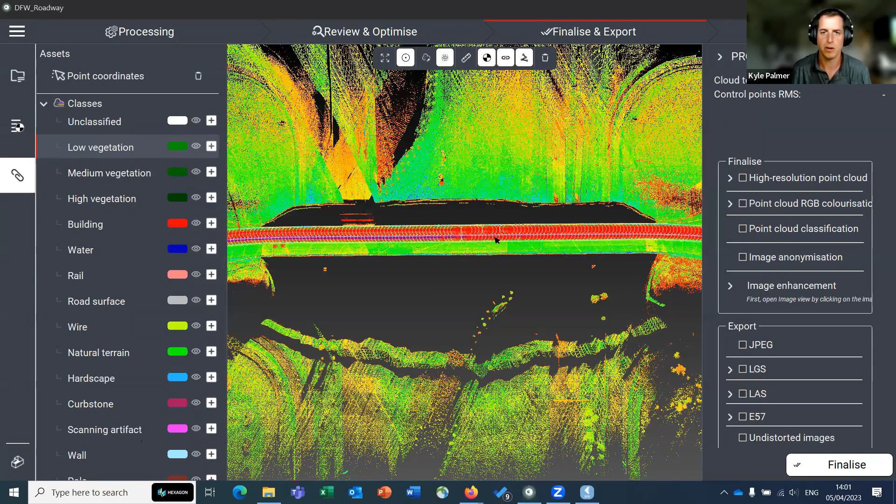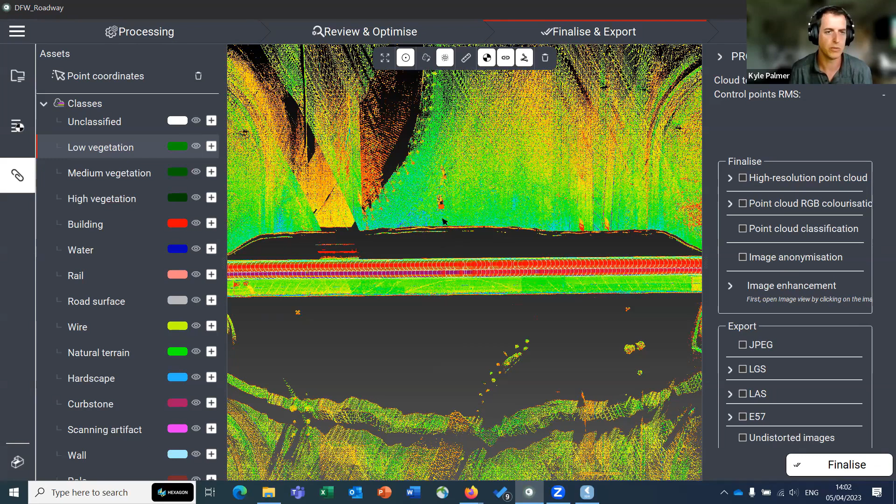So I'm going to go to a small little project that might look familiar to everyone. It's just an overpass, a 4-lane overpass, and mobile data. Looks really, really great, right? You got everything you need. Everybody's staying off the road, everyone's staying safe. And I talk to a lot of people at conventions and just on the phone, and they go, 'Well, this workflow is great and it's easy and it's helpful, but I've seen a lot of tools. What's so special about yours? Why does it get me there faster?'

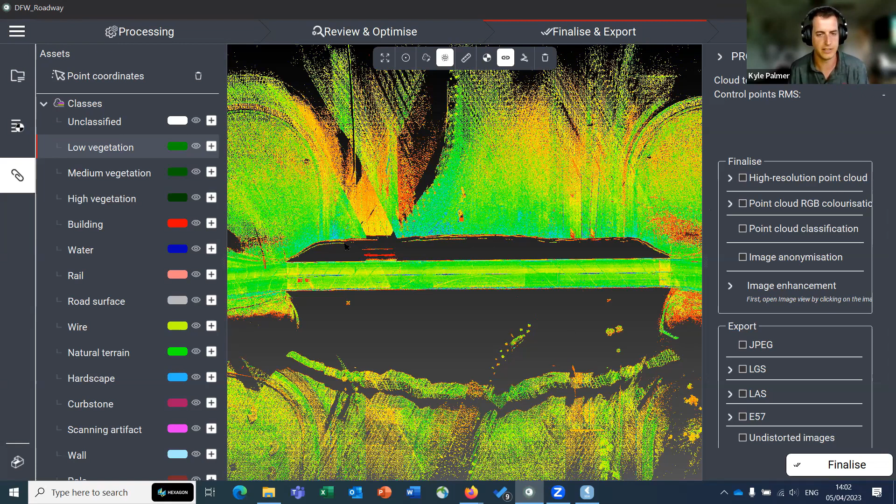Because the thing I hear a lot is extraction's the bottleneck, right? Well, this classification tool is really second to none. I'll show you why. To classify a point cloud, you get through the whole workflow - you load up your stuff, you get it on the right coordinate system, you do your QCs, you make sure everything's good. And then classifying is simply clicking this button, and it goes right to this fixed model. There's a series of layers here that you can see, and that list is growing and improving. So every release we get a new model update, so it gets a little bit stronger, better layers, but very semantic, easy to understand.

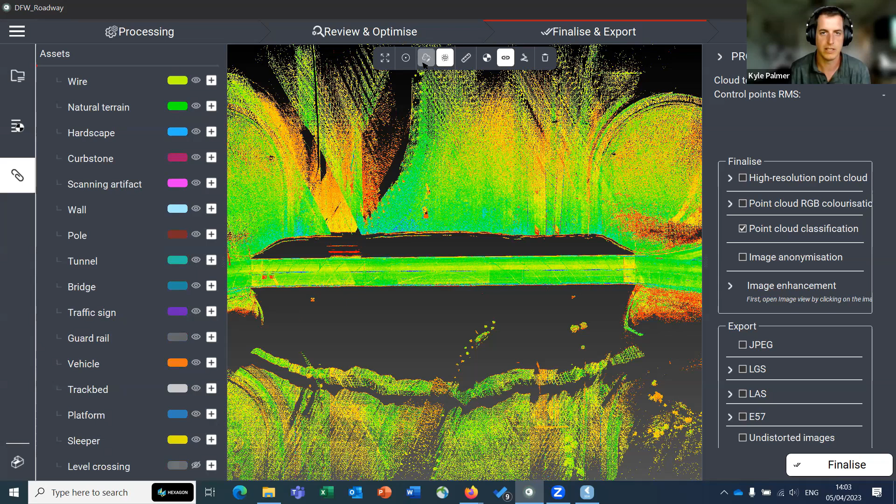So we'll talk about now what that looks like. You end up with a result something like this, right? So that looks great. We're here, we'll look at it in 3D, and I'll switch these off - they're a little bit distracting. Those are the track lines where I drove, and these red balls are the image bubbles, just in case anybody was wondering. So we'll go here and look and go, wow, that did pretty good.

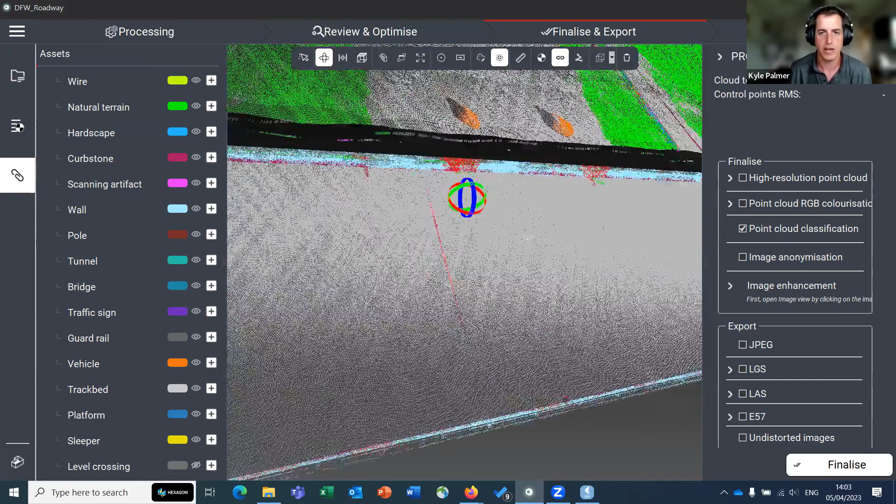So this right here is the road surface, right? And road surface, there we are. Road surface, so you can see it did an awesome job - it just pulled out the road surface right away. And I'll highlight the curbs - this is the curb one, I know this because of the color. And then this is a pedestrian, a man on a bike.

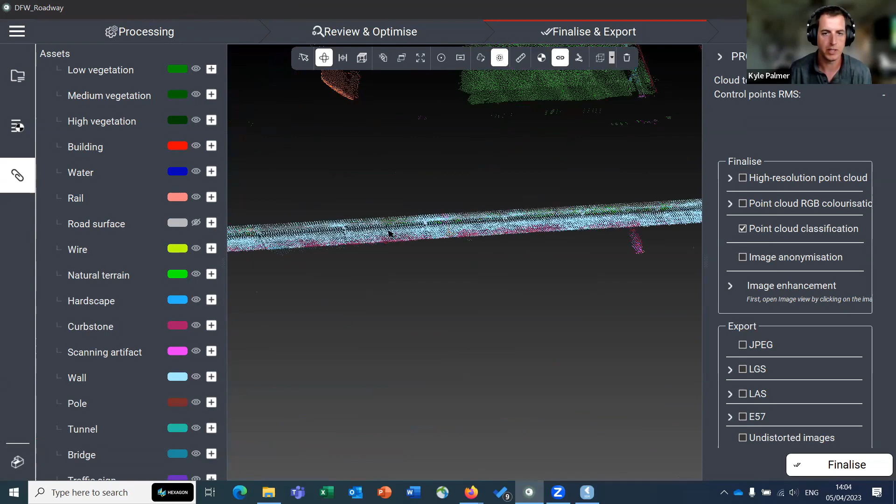So great job, right? Did an awesome job. But we can see there's a couple places where maybe it wasn't so perfect - it classified this barrier wall as a curb. I've just been working with this so much, I know these colors, but if I went and turned off curbstone, you could see some of those points disappear, right? Well, this is how easy it is to fix.

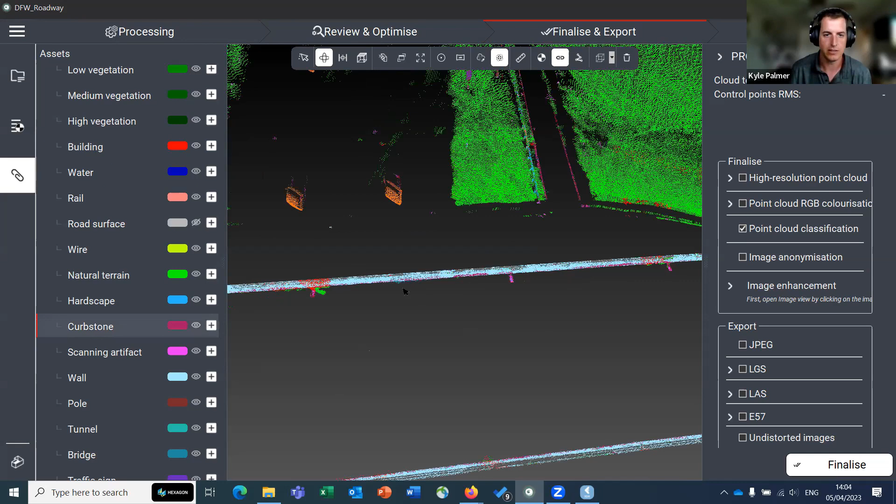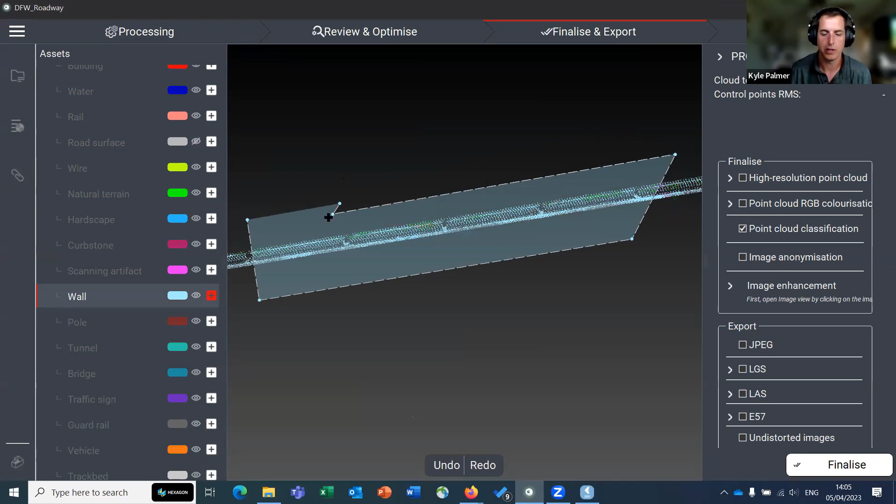We'll talk about fixing this real quick. So I want to go to - let's see - wall, so it's on that, it's all on that layer. So you can see there's a little bit of noise in there, right? Let's talk about fixing that. This is how easy that is: you just click the area that you want to fix that's separated from the road surface, just close it out, and it'll move everything into that wall layer.

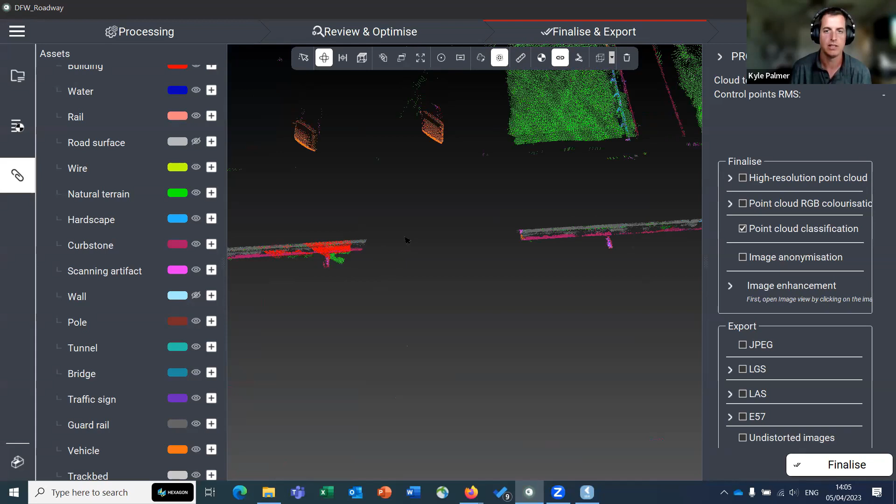So now when I turn off wall, you can see everything there from that wall is turned off. Now, I haven't done the whole wall, just to illustrate how powerful that is, but that's how quick it is. I've just talked about now how easy it is to fix the classification and how easy it is to classify. And then I know what a lot of you might be thinking - you might be thinking, so what?

Oh, it's great. It's all split up for me. Oh, what does that mean to me?

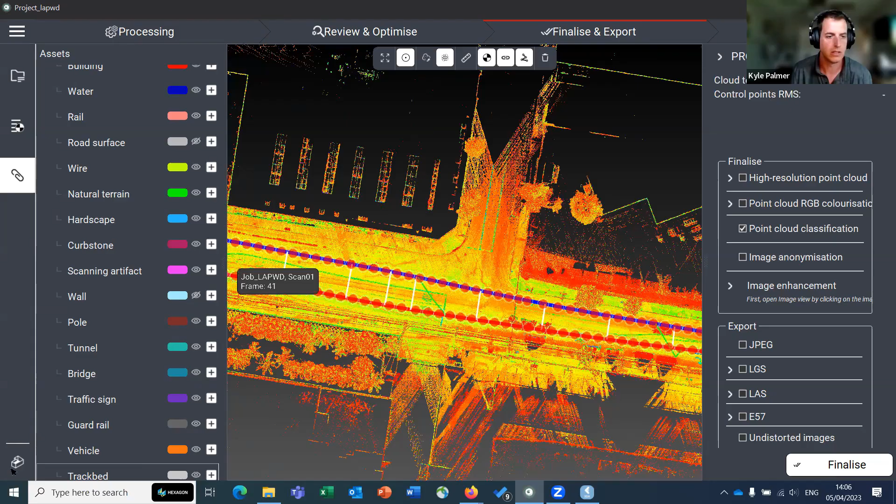I'll give you a great example. This is a project I collected in downtown LA. What would it mean to you to be able to take and do a quick building analysis for a client? We've got this road and this stretch of road, and we want to see if all these buildings match up to the building line.

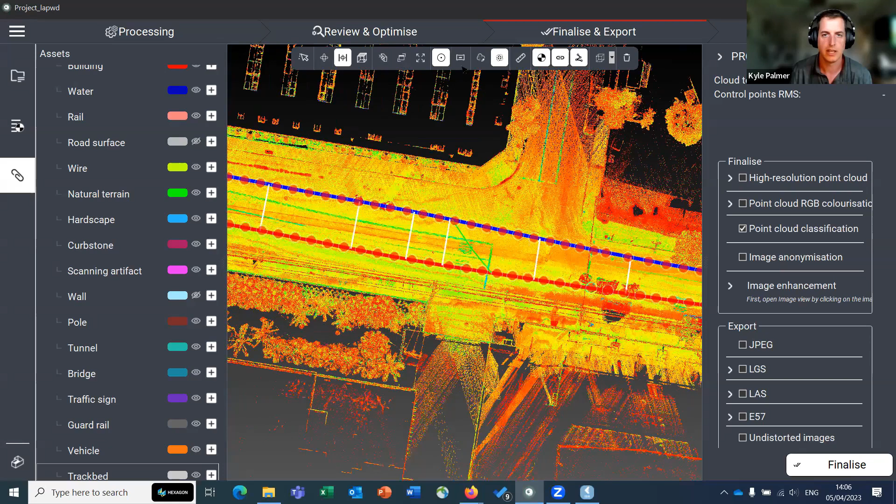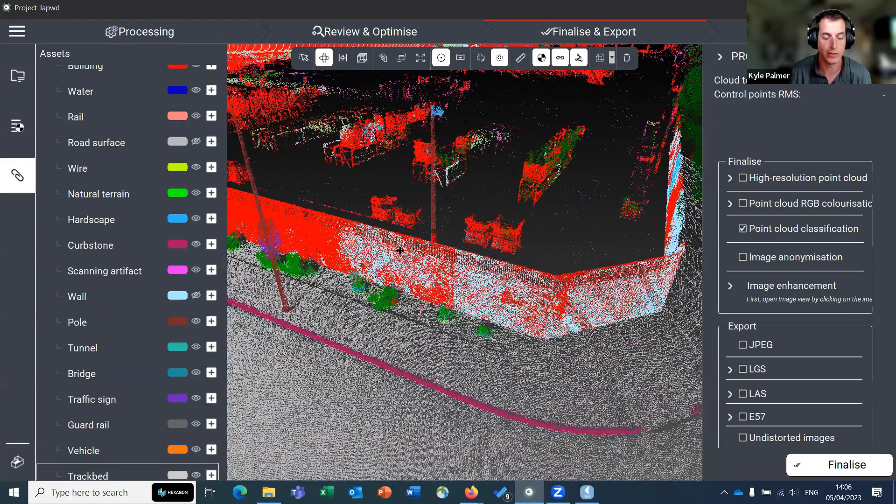Let's go look at it in orthographic, and we'll look at the classification. Look how powerful this classification is - it's classified all of these buildings. Like I said, it's not perfect, it's an algorithm, so sometimes there's a bit of a mismatch. It classified this as wall and then also building, but for the most part the building is pretty dead on.

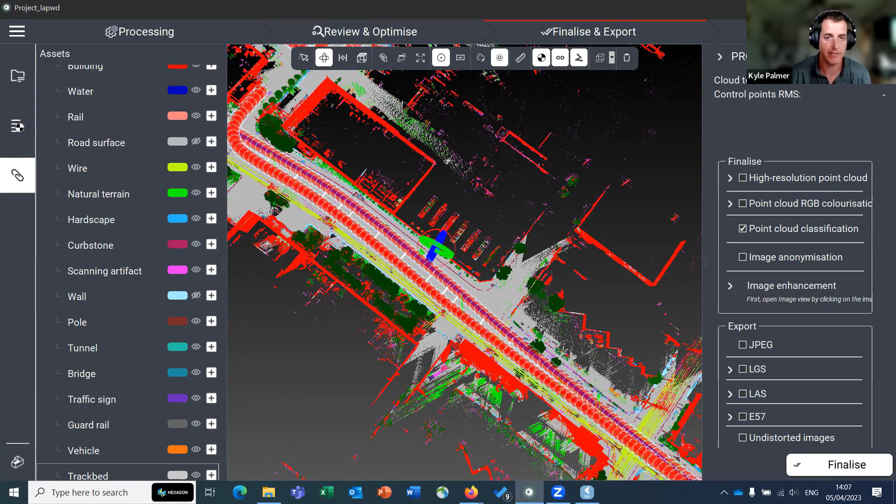So I could do a couple fixes, or I could export walls and buildings. I can pretty quickly port this over to something like Cyclone 3DR, or I could take it through CloudWorx and CAD and just trace out these buildings, or I can automatically extract these buildings. I could just have every single building in this project classified.

And the way that works, I'll show you here - there's a setting in Finalise. One of the really powerful tools in this software is the exports. You can export by a single track, which is this.

I'll show you here, we'll close this. This would be a track. You can export that whole track as one point cloud, or you can export by track as multiple files. You can restrict the size of the file - say you want a quick analysis and want to restrict the point size of each file. Then you can export by track and classes, and you can also split by the scanner.

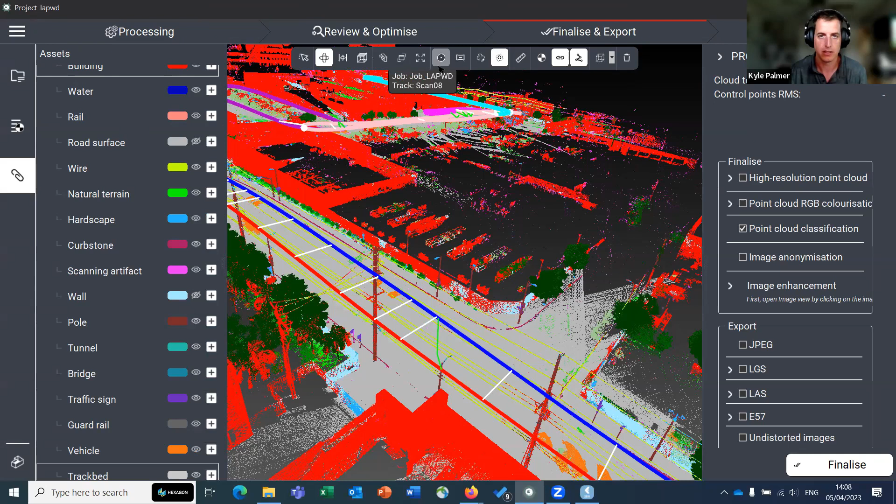So let's take a look at what that means. In this case, this is a TRK 700. What you can do is, this is a scanner and this is a scanner - you can split by those scanners and really fine tune what your deliverable is. And then you can split by class, exporting out individual classes. Each of these is a separate layer.

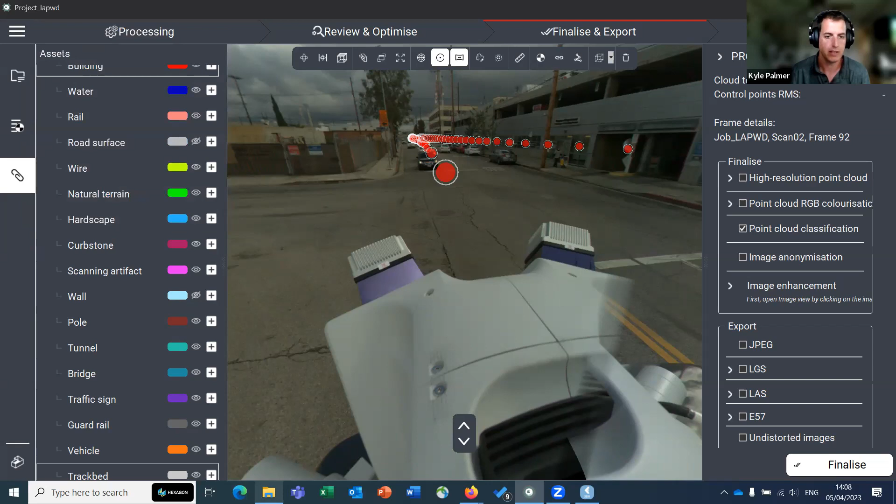So what that might look like, in the case of this downtown Los Angeles project I showed, I can just bring in every building and wall layer I want to and visualize those only. So let's take a look at that.

3DR desktop, we'll open a new instance of that and see what that looks like. I can perform an analysis on that - I can just pull in the road, pull in poles and wires, and work on the things I want to work on and restrict a lot of noise. So I'm saving myself some grief down the line.

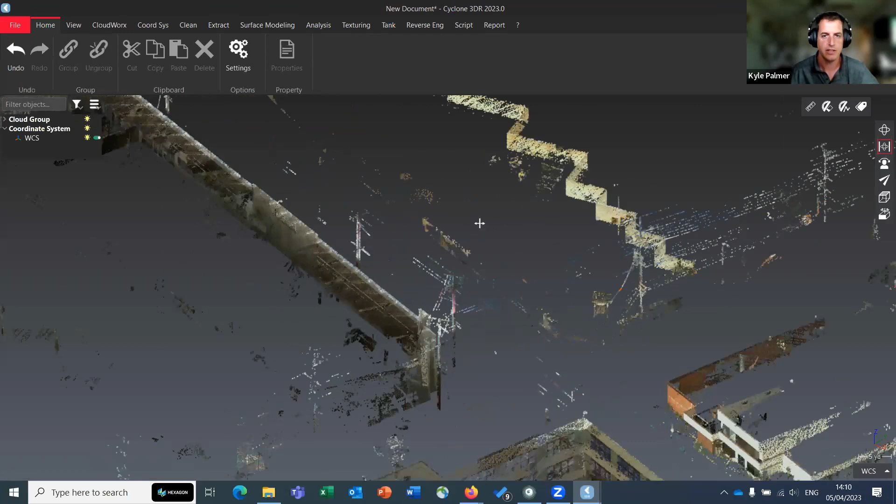Let's look for the building here. All right, let's just do that - we'll pull those in very quickly. And you can see what a good job it did just pulling in the building faces. So if I had to do a quick analysis, or I only cared about this one feature, I can quickly export these things and not bog down my resources on my computer by pulling in an entire point cloud.

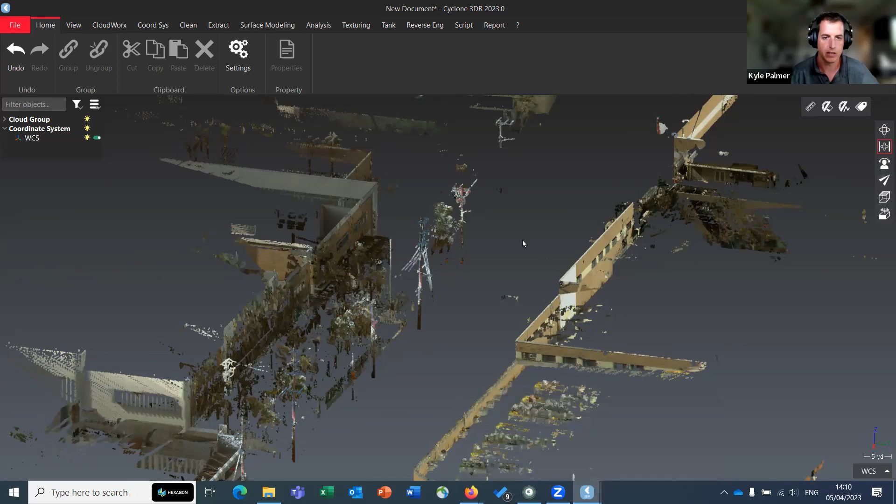Case in point, I have one here - a runway that I worked on. That's a great example of this. So let's look at the runway, the project demo I did. Let's go look at this runway here.

And this is about an 18,000 foot runway that I did 6 passes with full cameras and everything. And it's a lot of data. It's a ton of data.

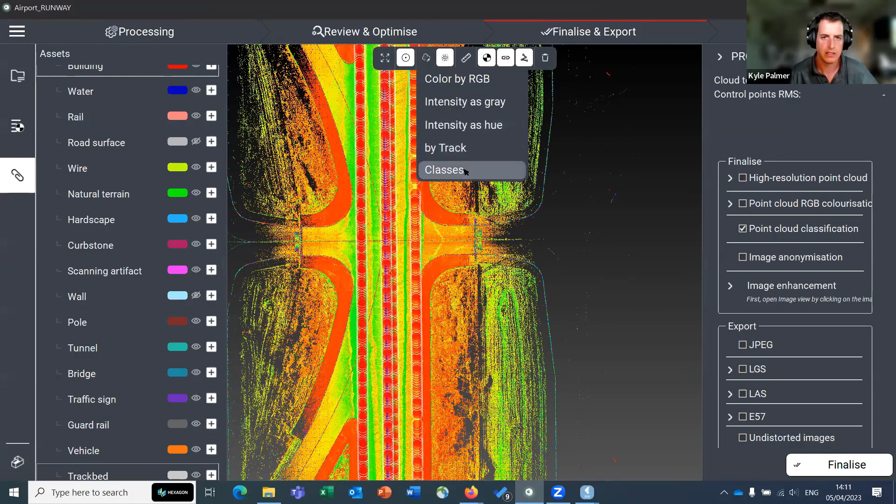But with the classification tool, one of the things I can do is I can basically switch off all the noise and everything that I don't want, and pretty quickly get to analyzing. So I can turn off vegetation, everything here.

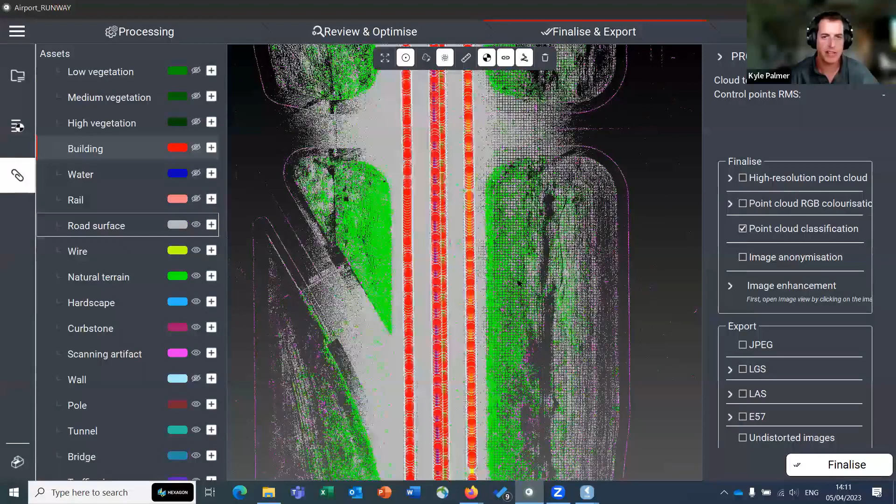What that ends up looking like is, turn off the natural terrain, we'll turn off everything here, all these guys, and a couple more. What that ends up looking like is this.

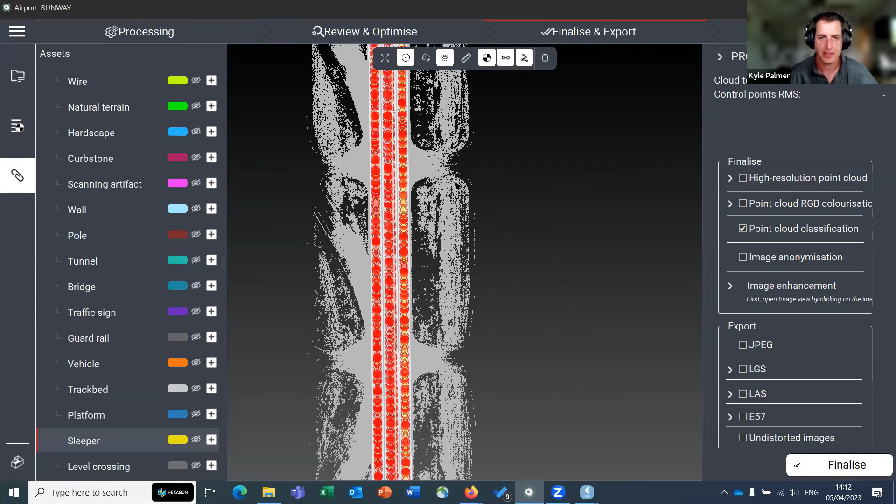So this is optimized to handle LiDAR data. Let's say the algorithm kind of messed up, like it did. It sort of classified some of this as pavement. Really quickly reclassify that as natural terrain. Done. That's how fast that is.

Then I can just eventually export out, and I've left it this way on purpose so I can illustrate this in Cyclone 3DR. So I can pretty much just export out this layer.

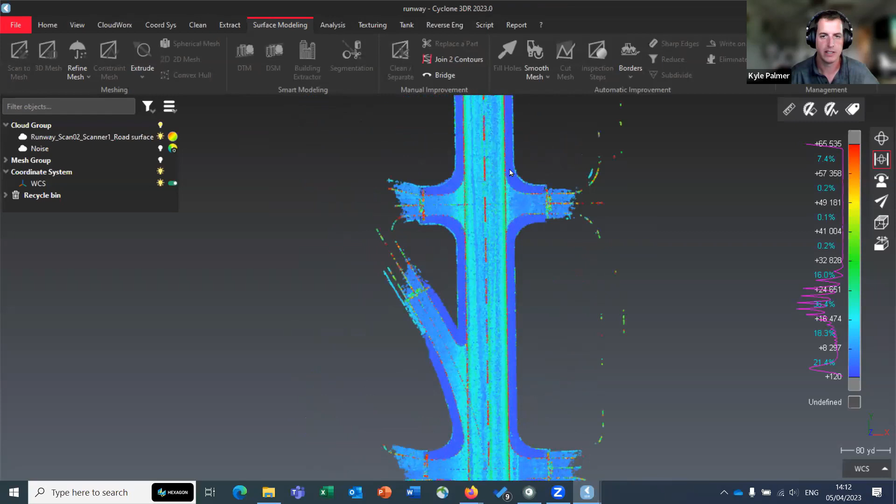And what that looks like is something like this, right? Where I have this and I can really, really quickly do a mesh, a ground mesh on pavement only, and then extract a 30-foot grid of topo points. So I'll show the mesh here.

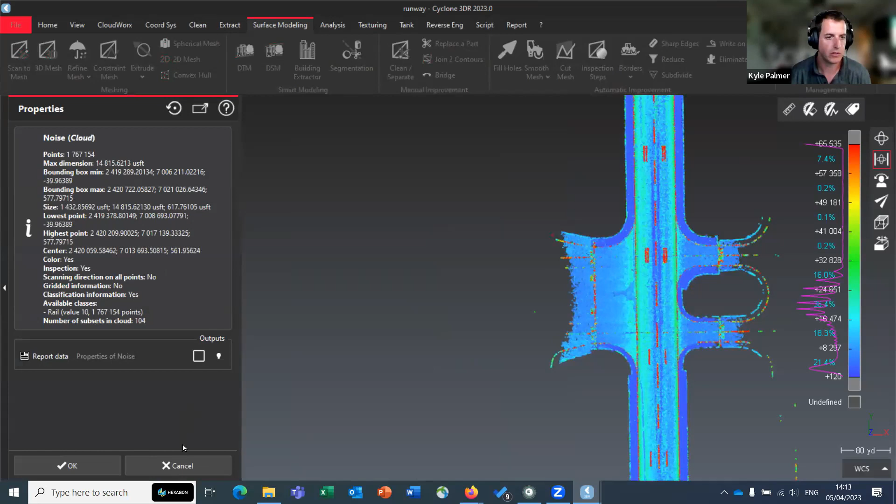So let's talk about this. Just the runway, it looks like we've got about 480 million points. And then that noise constitutes about 2 or so million points, right? That's what that would look like.

And then you can take a look at the mesh. You can do a mesh, and everybody knows and loves 3DR. You can do a mesh really, really fast, and we can just pull out the pavement on the runway.

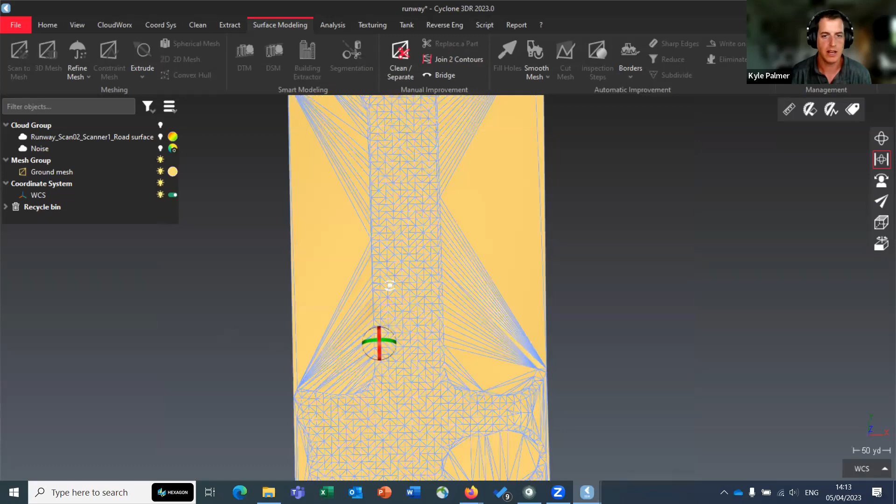I think this is a really powerful tool. I think it has a lot of potential. I think you have the potential now with mobile mapping and this tool to go extract all the buildings, extract all the poles and wires.

Or if you drove a job - and we always talk about in LiDAR and reality capture - you capture all this extra data, right? So you have all these edge cases, and you capture so much so you don't have to return to the project. Well, this takes that to the next step.

So, for example, if you were capturing all the poles and wires from a project along a roadway, and the customer suddenly said, well, we need to bring in some new equipment, right? We need to make sure it'll fit. We need to make sure we have clearances.

Well, you can say, let me shoot you over the runway. Let me shoot you over the high vegetation. Let me shoot you over any bridges or structures, just that layer, so you can do an analysis on that. This gets you there really, really quickly.

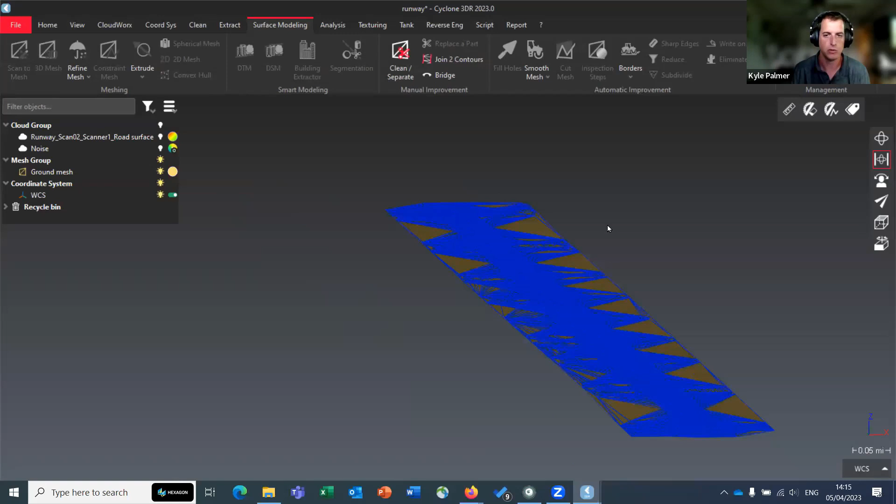Or you can pull out all the walls and fences on the side on a long linear project and do a quick right-of-way analysis and see if you have any encroachments. But that's it. It's a pretty quick tool. I'm proud of it. I think this is a great product, and I think it's very powerful.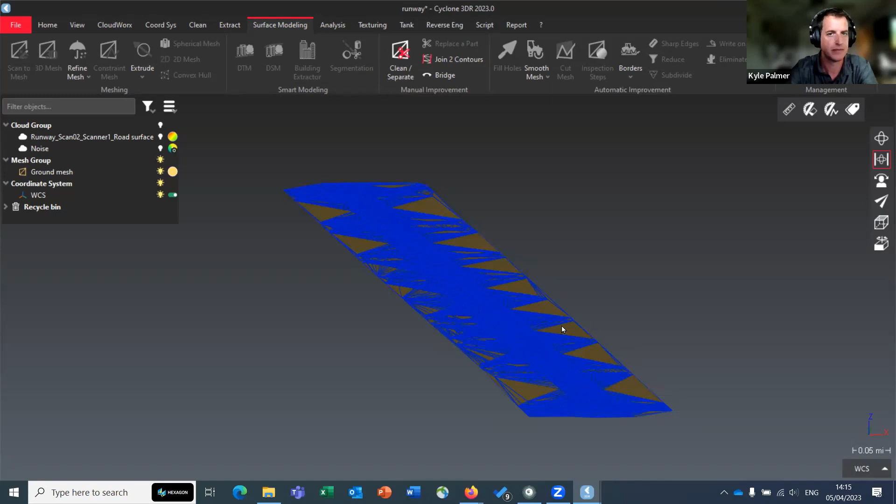So Kyle, one of the questions that we had come up from our Facebook group is someone asked, what is mobile mapping? And I realized, well, for those of us who work in the industry, that might be somewhat self-evident. At the end of the day, I think folks that come from a background of static mapping - placing your scanner in one place and shooting for a period of time - might not be familiar with how mobile mapping works and what are some of the benefits and parameters of it.

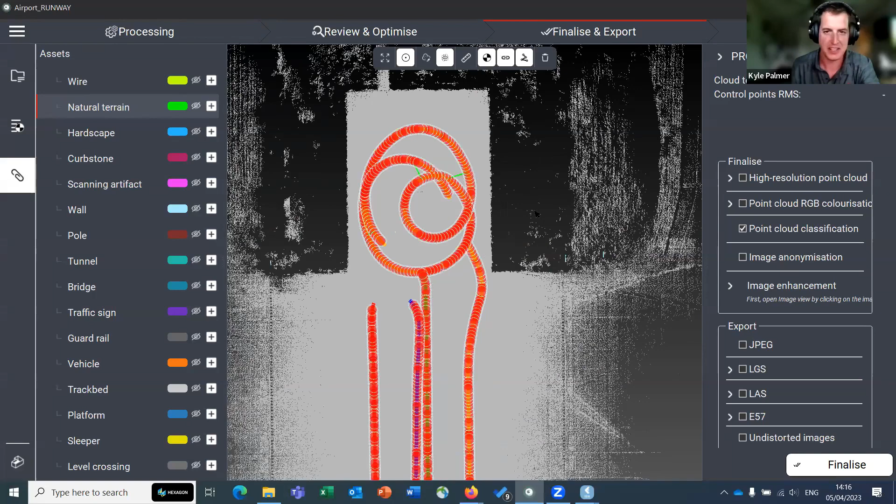Yeah, I'd be happy to answer that question, and it's a good question. I started this off with the assumption that we'd all know, which maybe I shouldn't have. Thanks for asking, I appreciate it. I work in it all the time, so I forget to look up every now and again and educate on that aspect. So mobile mapping is...

a process by which you put a sensor on a moving vehicle and collect LiDAR data and imagery at the same time. So there's multiple sensors.

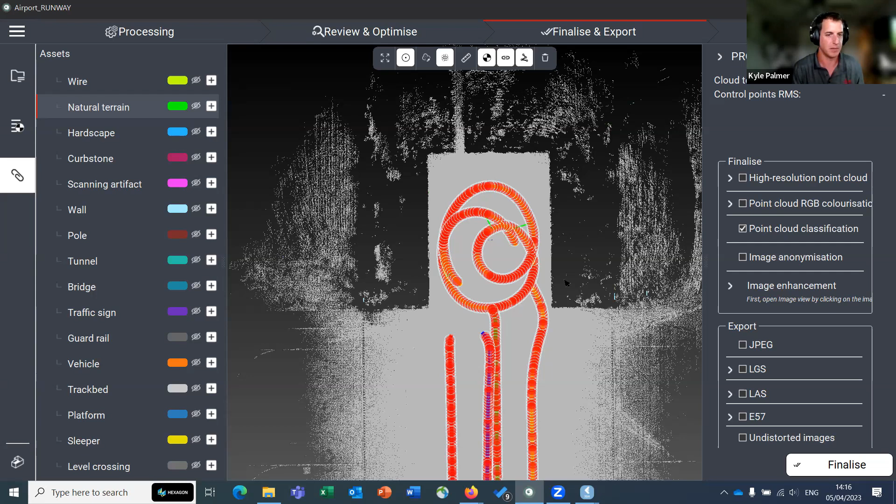Let's take a look at this one, let's take a look at our guy here. This is what the sensor looks like, and this is what the collection vehicle looks like. We'll just take a look at it in reality here. So this is our sensor - this is a TRK, and I'm in the tower cam.

So right here, you have our main workhorse sensors. This is an Optech CL360 HD, and what it does is it spins in a circle - it just shoots LiDAR out in a circle, right? Both of these, and they're at a 30-degree offset.

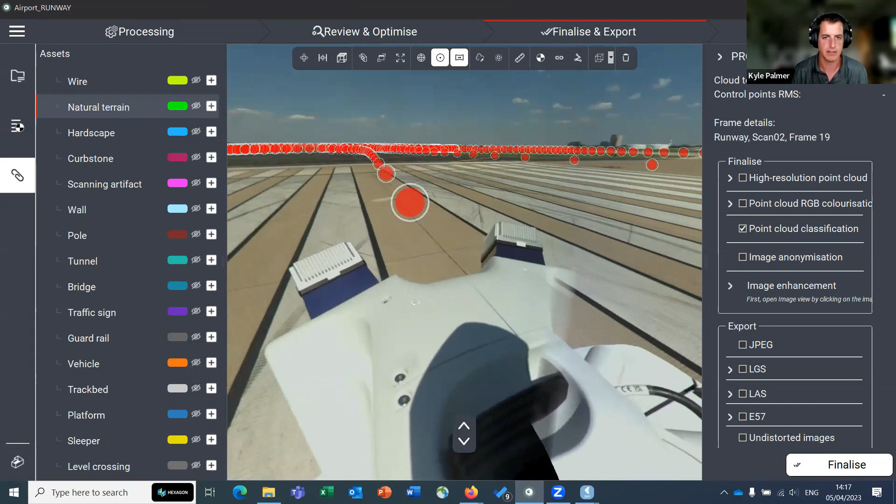Underneath me, actually right here where we're looking, is a GNSS sensor, and then underneath that is an IMU. The GNSS sensor records the absolute position of where we are at a periodic rate, right? And then the IMU records movement.

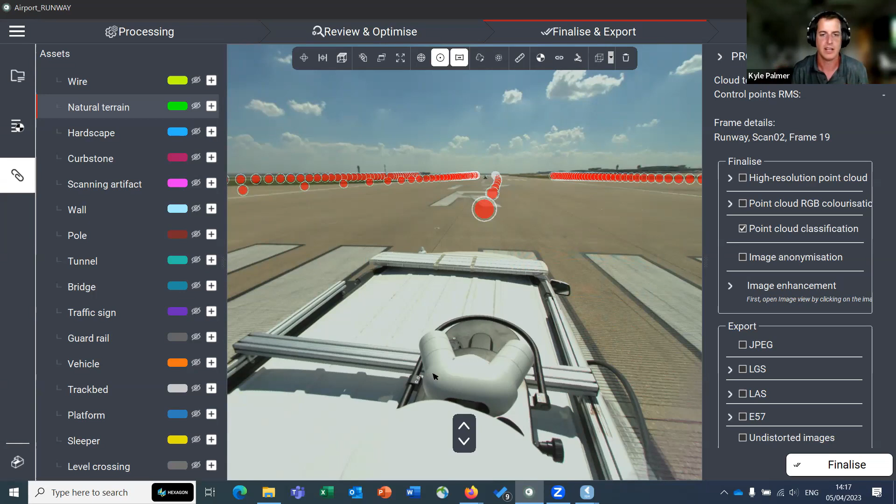It's maybe out of the scope of this how an IMU works, but basically it's a fiber optic kind of strand that moves around, and there's some sensors that show how it moves around. And then each one of these sensors resolves to this one, the GNSS, and then the IMU - they resolve to a line called the trajectory line.

So we'll take a look at what that looks like. This would be the trajectory line, and it shows how you drove. So as we drive, it moves along. We'll go back to our sensor here, back to our sensor point of view.

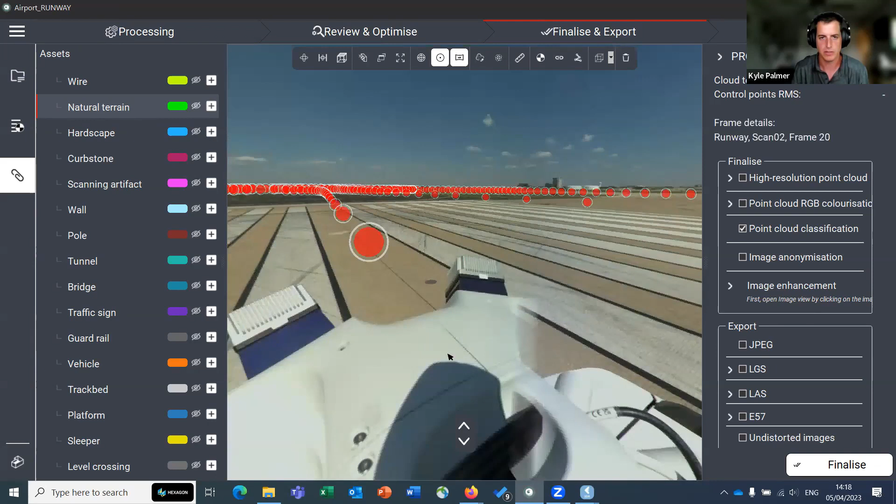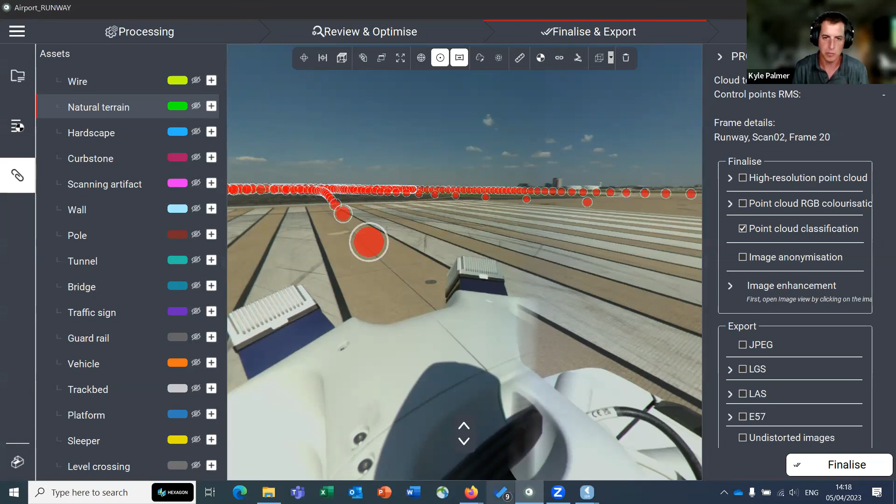It moves these along because these don't spin like your traditional terrestrial scanner - they just spin in a circle. They don't move around an axis and then spin around like an RTC 360, right? They don't do that, they're just stuck there. So as you move, that's what creates the point cloud.

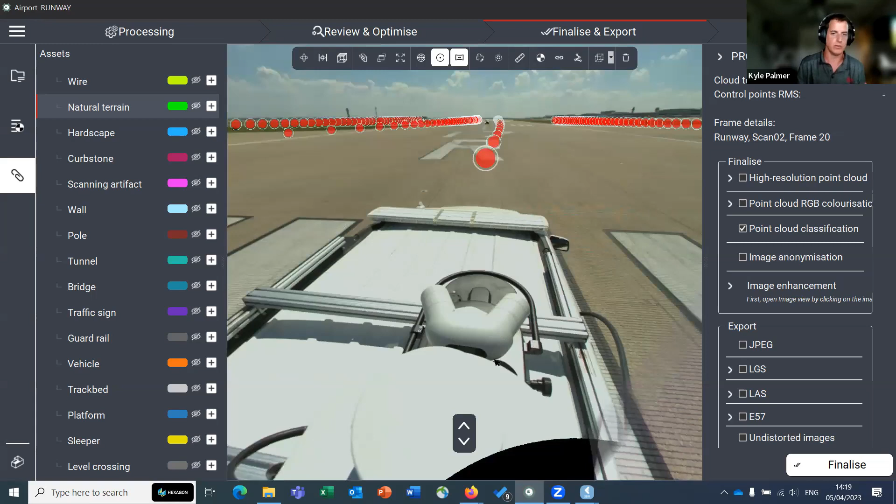There's also two additional sensors in here. There's a SLAM sensor, which is short for simultaneous localization and mapping, and it uses a Kalman filter to use LiDAR to determine a trajectory. There's a sensor in the front, and then you can't see it on here, but there's a sensor in the back underneath the body of this thing.

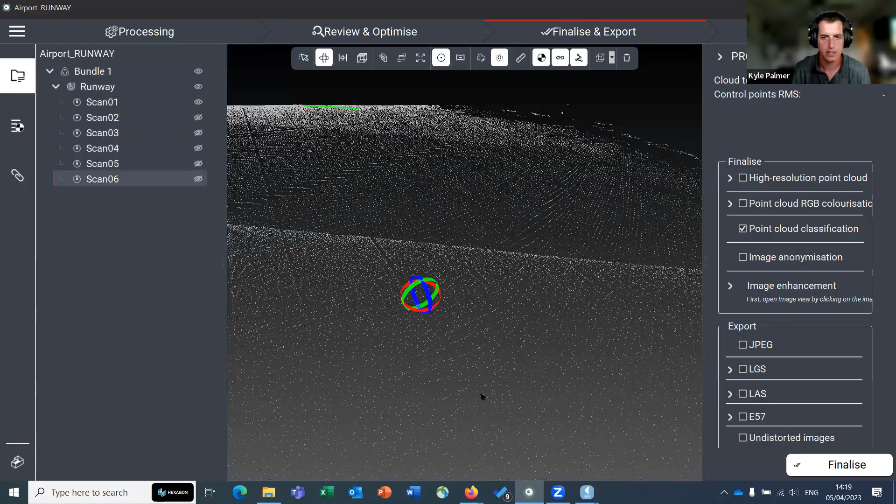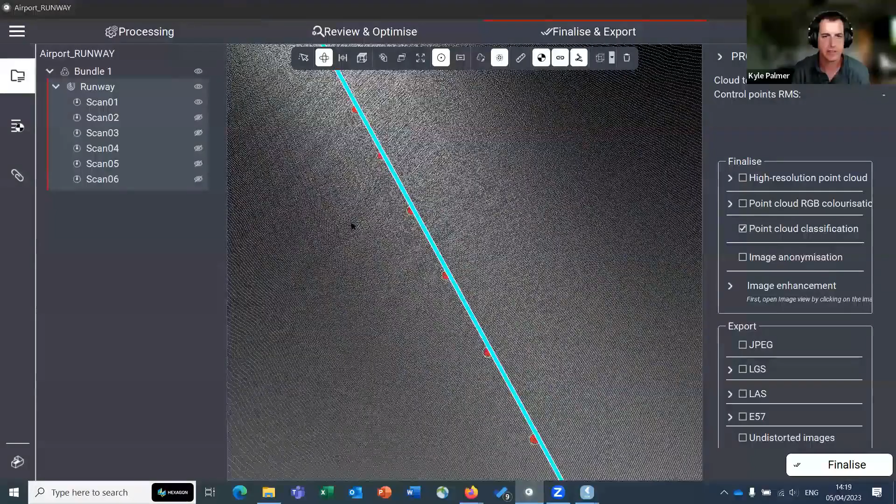So a good way to look at this, let's turn off all of these, and we'll look at how this LiDAR looks. That's a great way to show how it looks. So you can see - let's turn off one scanner, we'll turn off scanner 2. So you can see it kind of moves along in a line, right? If you look at this, it's kind of like a line of data that comes off there.

And then every little bump and dip is recorded by the IMU, so you can see there's like slight waves because this isn't a perfectly flat surface - the vehicle moves up and down. But all that gets smoothed out into this trajectory line, and then the LiDAR gets snapped to this line. So think about the analogy I was told when I started: think about a snake. This would be the backbone of the snake, and these LiDAR points would be the rib bones of the snake. I think that's a pretty good analogy, I think that really works.

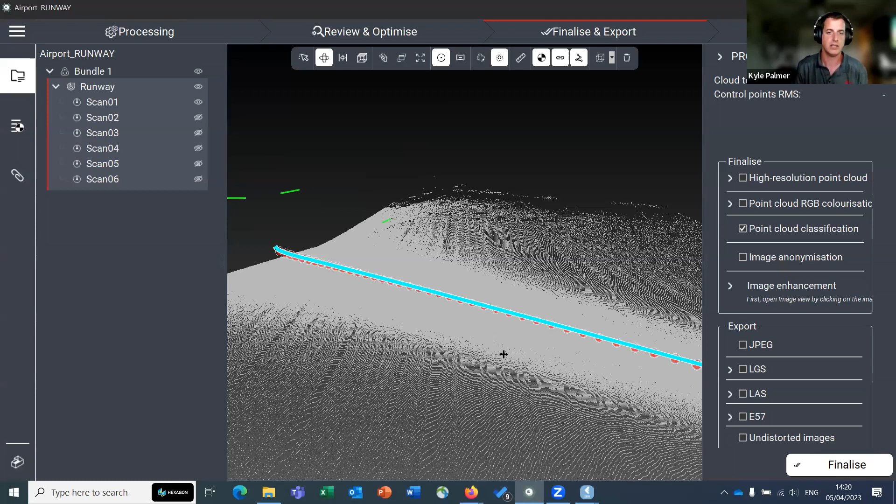Does that answer the question of what mobile LiDAR is? I'm looking - looks like it does. Okay, good, so we have another question. Boy, I'll tell you what, Kyle, you have got more questions than most of our lecturers.

This is great. Okay, one of the questions is, with the classification tools being introduced into other Leica platforms, such as Reg 360, is the classification engine the same across all of them? Would you get the same results if you classified in 3DR versus the software that we're using here? No, they're different models, but there's a way to send these layers over to 3DR so you can preserve them.

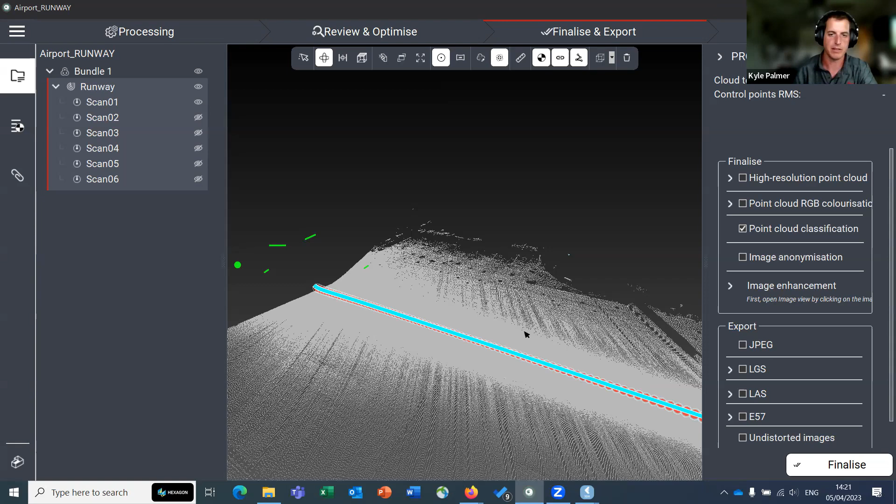If you took the raw point cloud here and didn't classify it, then sent it over to 3DR, you would get a different result.

Follow up question from the same person: are there any tools in the development pipeline that would help streamline the classification of points? Perhaps instead of having to draw a box using the fence tool, could you just select a plane similar to the region grow tools to help the software recognize that it should be part of the same classification?

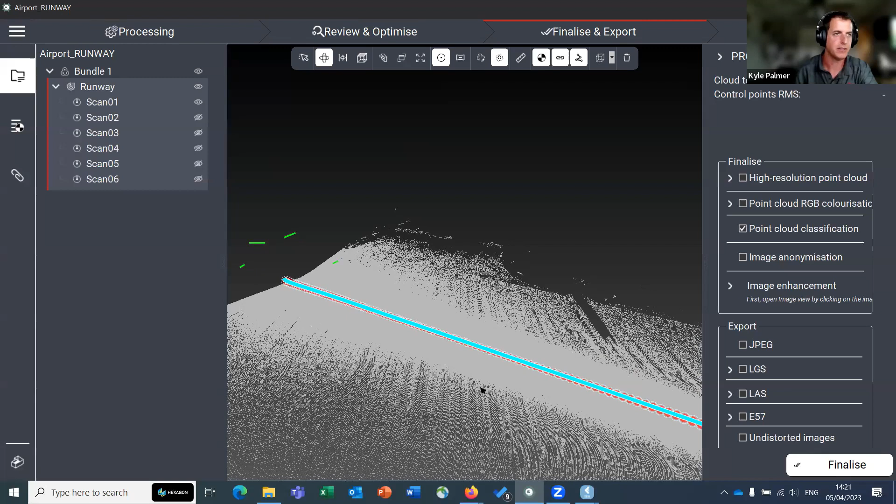Not that I know of yet. The next major release is coming soon, I believe in a couple months, and we'll see what comes out in there.

I expect this was a new tool, the reclassification, and I think it works great in my opinion. But yeah, I would like to see more tools in there, and I'll write that down as a suggestion for our team, maybe they're already working on it.

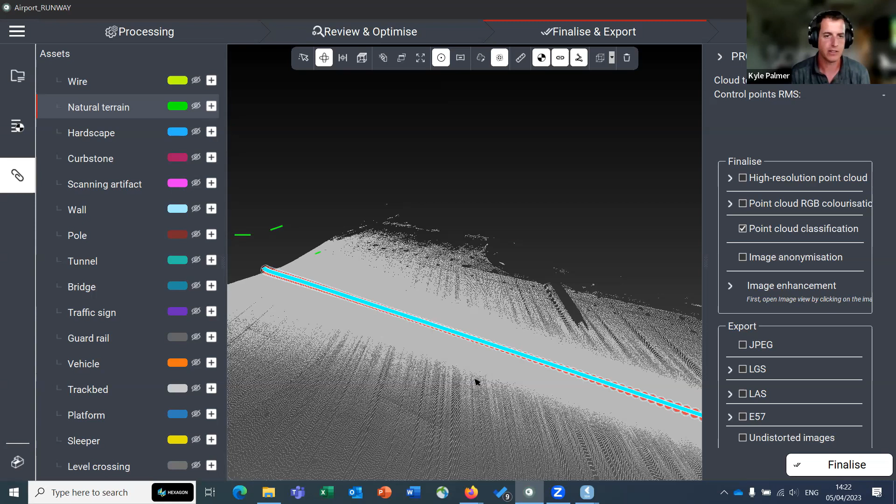That's something, but as far as I know, nothing along the lines of planes, or at least not from what I've been told, is in the pipeline yet. From the product management side, that sounds like a really great feature. It does, yep, I'm writing it down. It's a good idea, I've got it written down here too.

Another question coming forward: how many classification items are in the library, and what is recommended to control the drive? Are control targets recommended, and how many controls per mile?

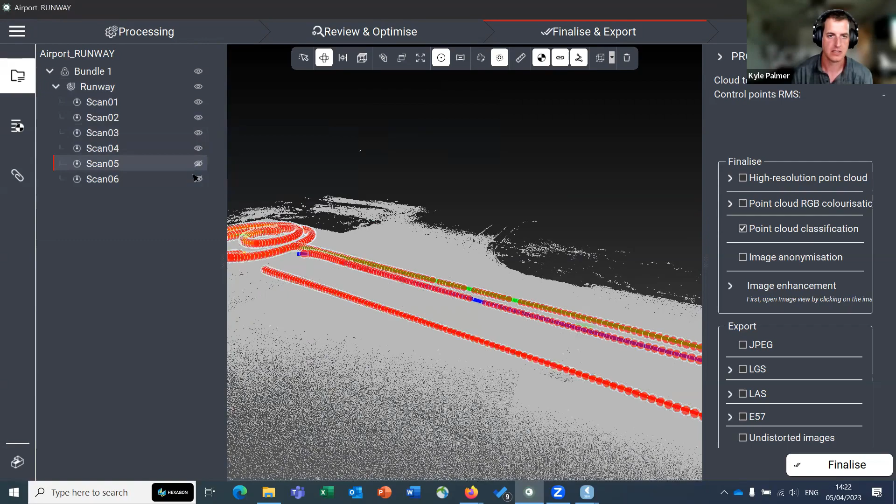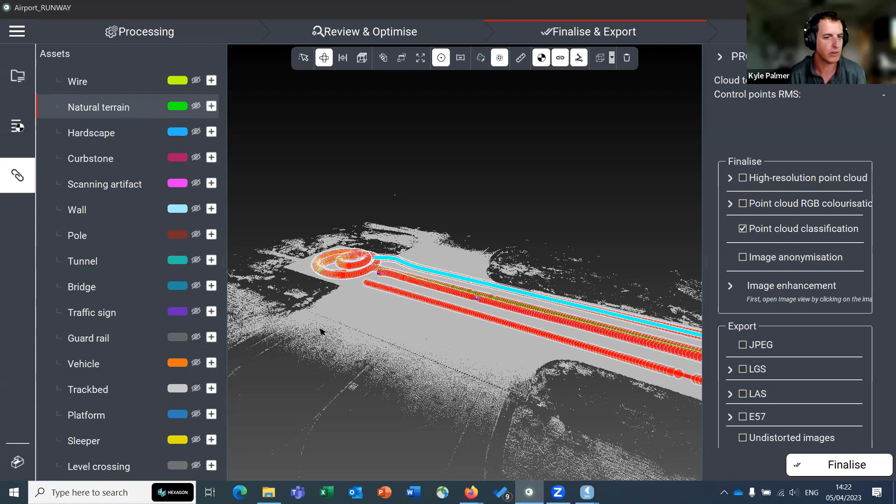It's about 20. Every time we get a release, this gets refined, and it kind of goes up and down, it's about 20. For example, on an earlier model there was a viaduct, and that's been removed. So I expect more layers to come that are a little bit more useful. But yeah, it fluctuates, so I don't want to tell you a number and then you go, well, they said there's this many layers. And the second question was, what was the second question?

Hang on, the second question was, what is recommended to control the drive? Are control targets recommended, and how many controls per mile?

It depends on the accuracy and the requirements of the project. If you're working for a DOT, they probably have a manual that you have to go by. So for example, a general rule of thumb is every 500 feet, and then you tie every 1,000 feet, and then you use the ones in between as checkpoints to check your data, check your solution, and keep those independent of the solution.

Because what happens is it's like a nested registration. You use the targets, and it works them into the entire registration. So you want to leave some targets independent of that, so you can check and make sure you have a good registration, about every 500 feet.

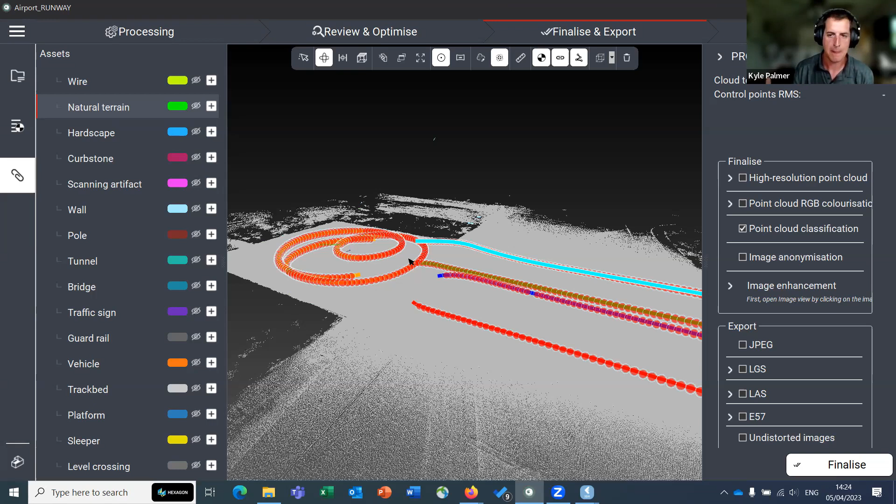Now that being said, this has RTK on it, so you can connect to networked RTK like SmartNet, and you can just drive a project. Like this massive huge project where I've done 4 tracks on, a little over a 3-mile runway.

Let's go to processing, right? It's a huge set of data, like hundreds of gigs because of all the images. But one of the really cool things about this is...

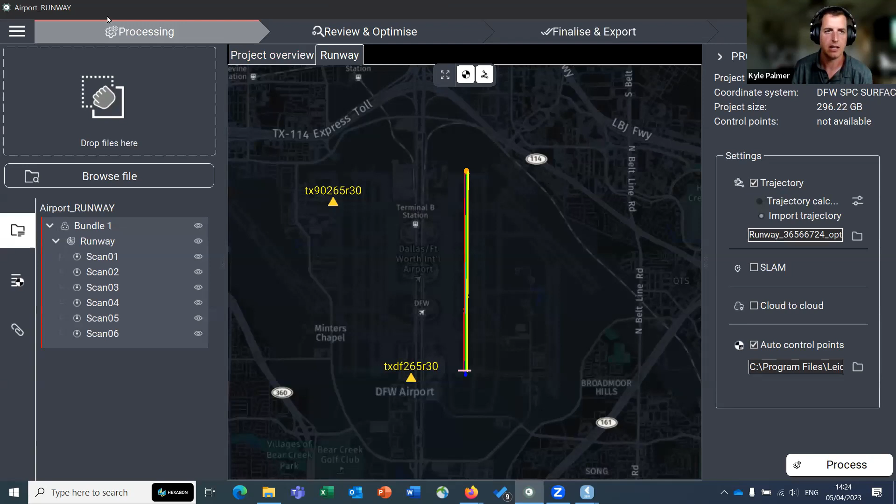I'm okay with RTK, let's take a look at this one. Actually, let's go look at this one, it's on a drive. I'll go on one that's a little bit faster. We'll go back to a good example, I love this one, it's a good one.

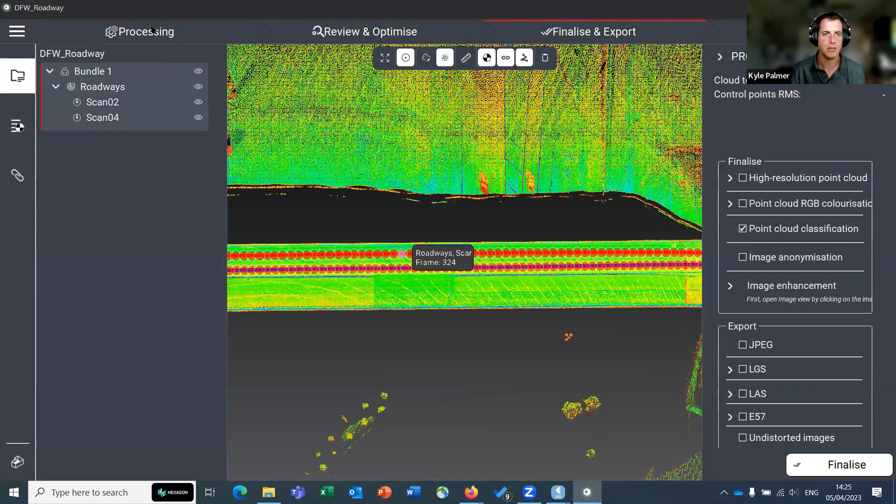So every project you collect, if you go for the RTK option... give me a moment here. As you're driving and you're connected to an RTK service, in this case SmartNet, you get on the fly an RTK based trajectory. So as soon as you pull this off the drive that goes in the computer connected to the sensor, you have this trajectory. This comes over with the project, with everything.

And if you click this and hit OK, blah blah blah, you hit open, and then you hit process, you can just blast through this thing. You can get all this data out real quick. It's going to have a little bit more slop in it because it's RTK only, an RTK only trajectory, but there might be a case where that's all you need.

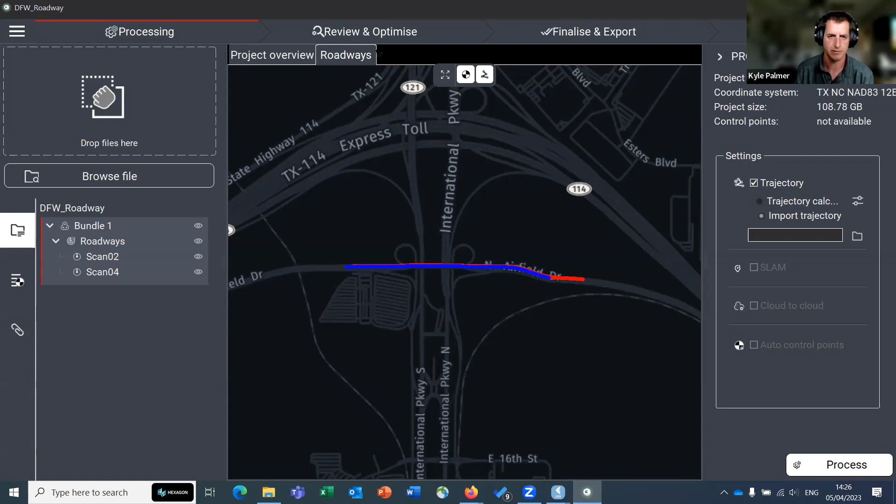Maybe you just need to do a sign inventory. Maybe all your customer cares about is these images, and the LiDAR is secondary. Maybe all you want to know is an engineer just needs to see what this bridge looks like, for example, and check if there's any spalling or cracking. Let's go forward here.

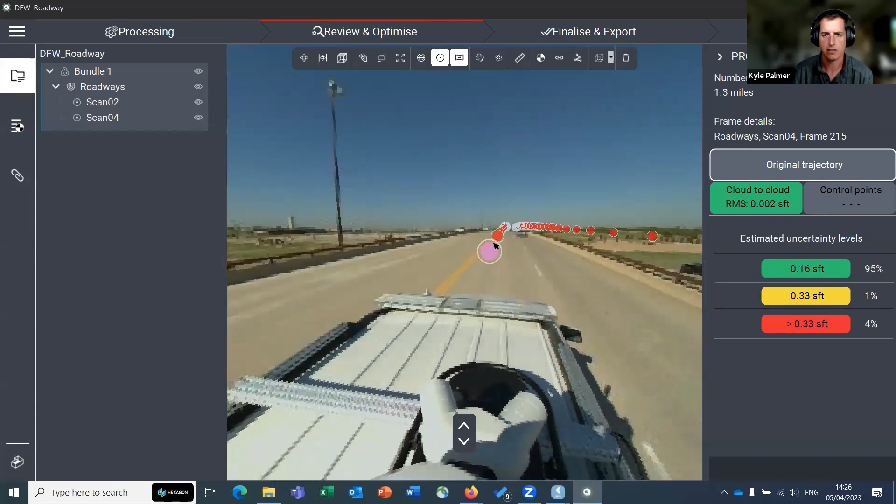Maybe there's spots, for example, a bunch of pictures - that's all the engineer needs. You can get that out on an RTK. I can run this project in 30 or so minutes, shoot it out on an RTK-only trajectory, and get all the images in LGS and TruView, and they're off to the races in a day.

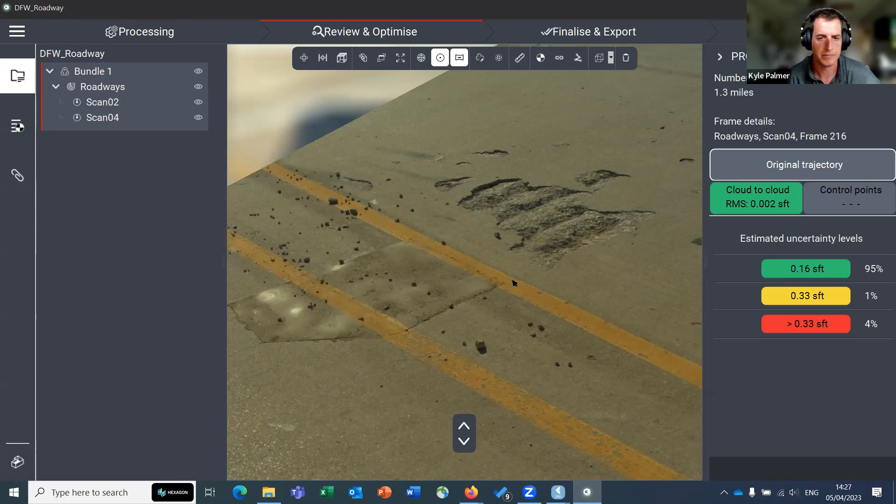There are different levels of accuracy you might want to tune to, and this gives you the flexibility to do that - RTK only, PPK, PPK with multiple stations, your own base station, and all the way up to incorporating control points on the ground.

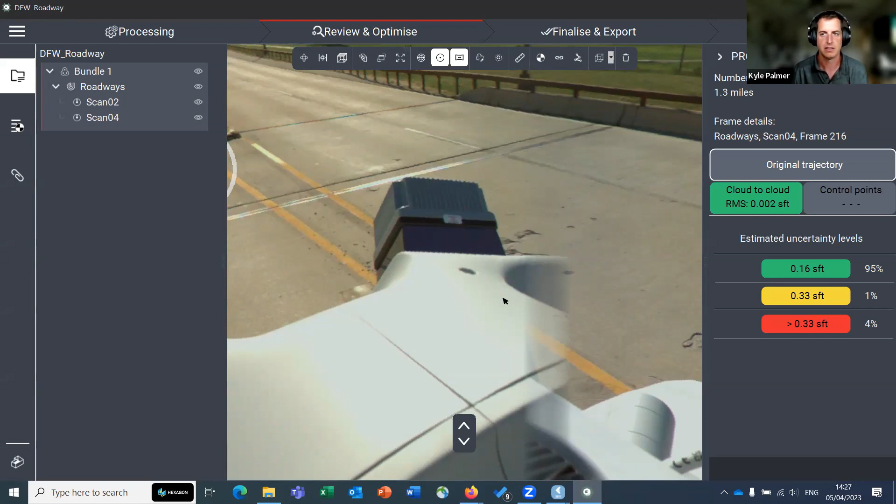Hopefully that answers the question. I know it's a little long-winded, but it was very informative, and I think you gave folks exactly what we try to achieve here at Lunch and Learn. We have time for one more question, and this will end our session today.

The question is, for those running Pegasus Manager, what are the primary benefits of going to Pegasus Office? It's a lot easier - we're not supposed to say easy here, but the workflow's cleaner. Admittedly, a lot more stuff is not exposed to the user.

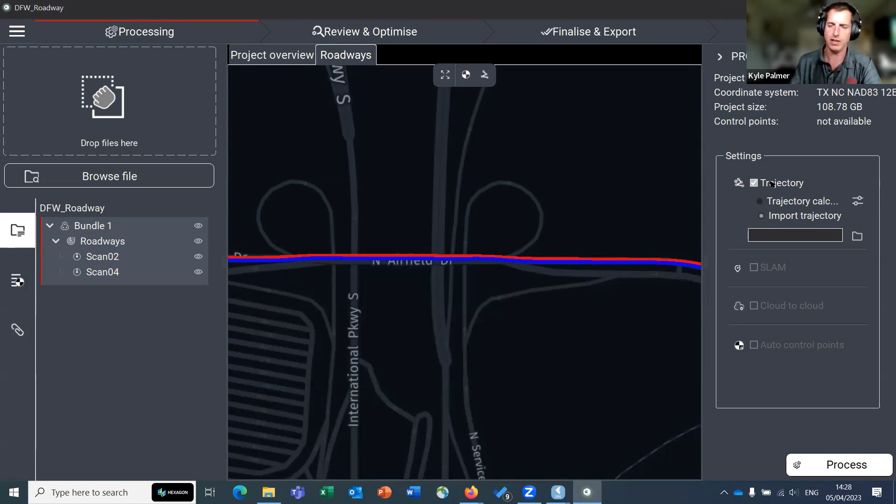But in a way that's good, because if you have a normal project and you've done all your field procedure, you know your stuff.

This is nav prep. This used to be multiple button presses and multiple clicks, and if you miss something in Pegasus Manager, you might have to go back and do it again. This button right here, nav prep, replaces a lot of those clicks and does most of the work for you. Processing SLAM is really easy.

Most of it is just a button click, because honestly, the time I need to spend isn't here. This is meant to get you all the way out to here as fast as possible.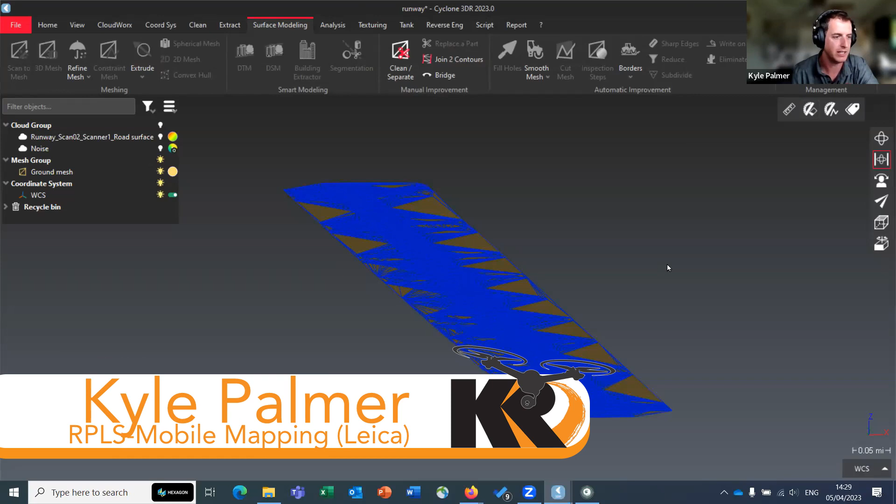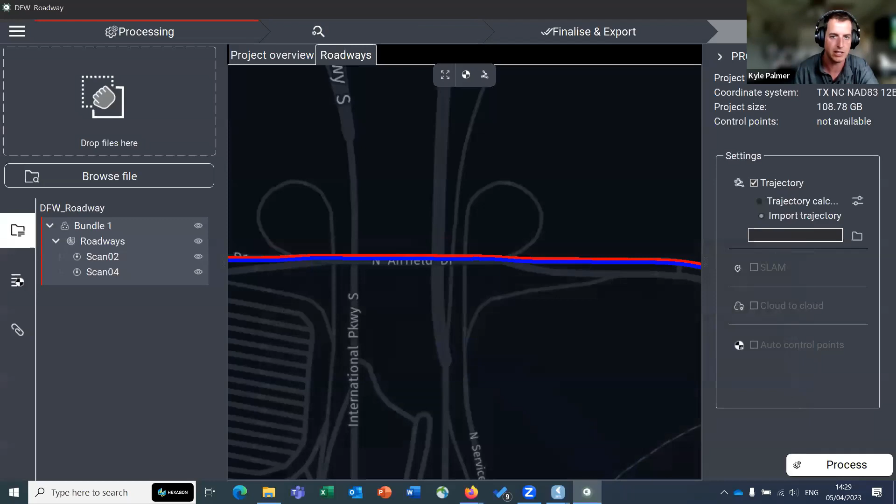And that's the primary benefit - you get your point cloud out as fast as possible, because this is a ton of data with a ton of features to extract, and most of these projects have a lot of downstream work to go with them. So that's what I'd say the benefit is.

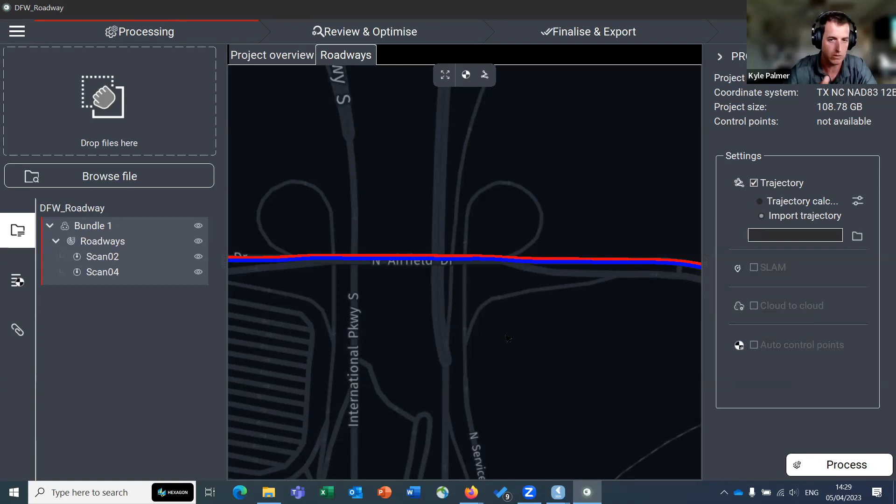And there's full support. Whoever's asking that question, I can't see you, but if you've got a P2 or a P2U, please reach out to me. I'll walk you through this and show you how to use it, and you'll see right away - you'll want to start using it.